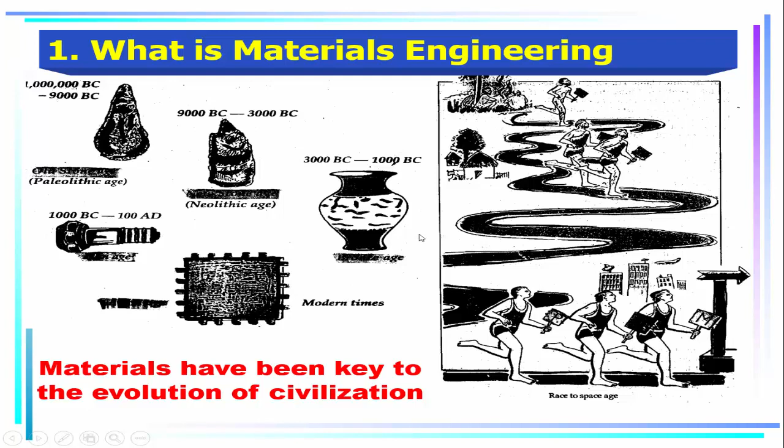The content of this lecture will be what is materials engineering. We will see the language of materials, role of materials in product success, inspection to prevent failures, materials repertoire, and global considerations.

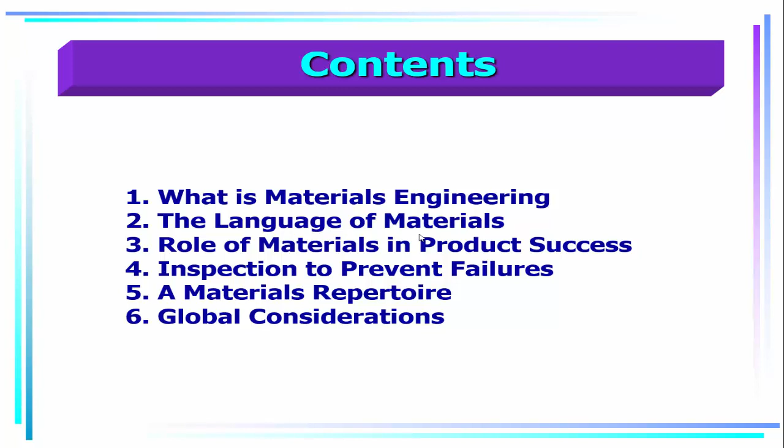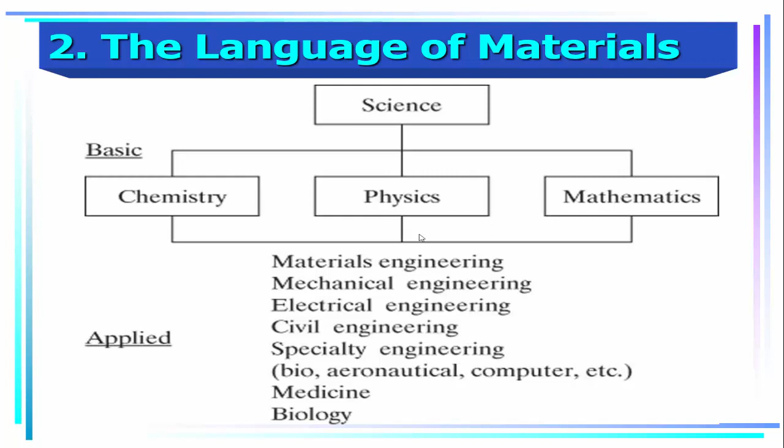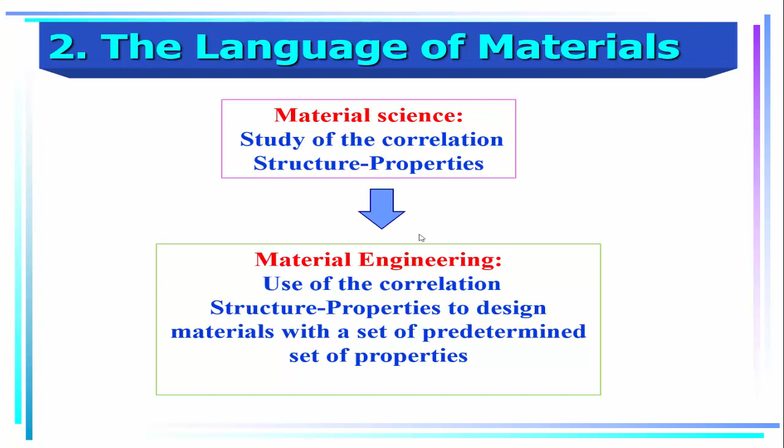The language of materials. We have the basic one, which is applied in science, chemistry, physics, and mathematics, and it is also applied in materials engineering, mechanical, electrical, civil, specialty, like bio, aeronautic, computer, and it's also applied in medicine and biology. So in material science, it's all about the study of the correlation of structure and properties, and in material engineering we have the use of the structure-properties correlation to design materials with a predetermined set of properties.

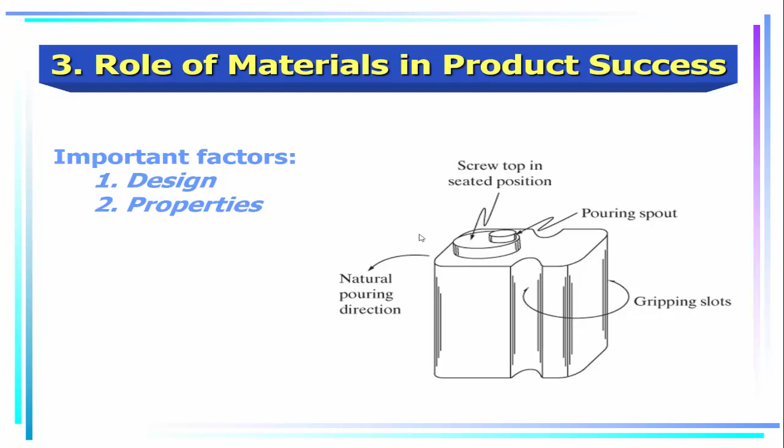So the role of materials in product success. There are two important factors, which are the design and properties. We have here a small example, like natural pouring direction, pouring spouts, screw top in seated position, as you can notice here, and we have the gripping slots.

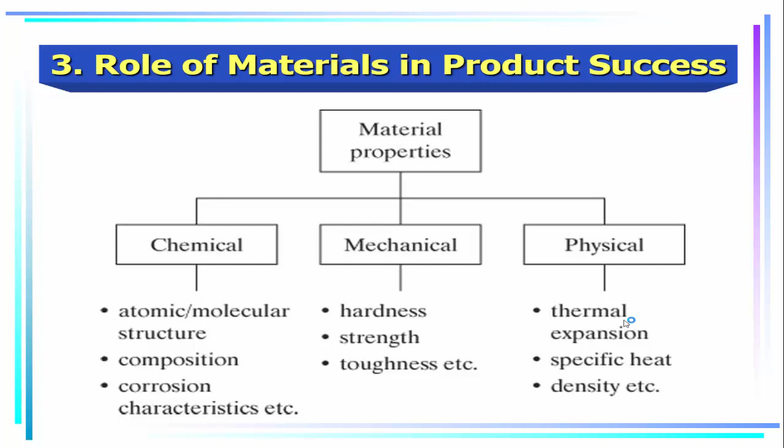So the role of materials in product success. Actually, the material properties are three. We have chemical, mechanical, and physical. Chemical, it's all about atomic, molecular structure, composition, corrosion characteristics, and so on. For the mechanical properties, it's all about hardness, strength, toughness, and so on. For the physical, we have thermal expansion, specific heat, and density.

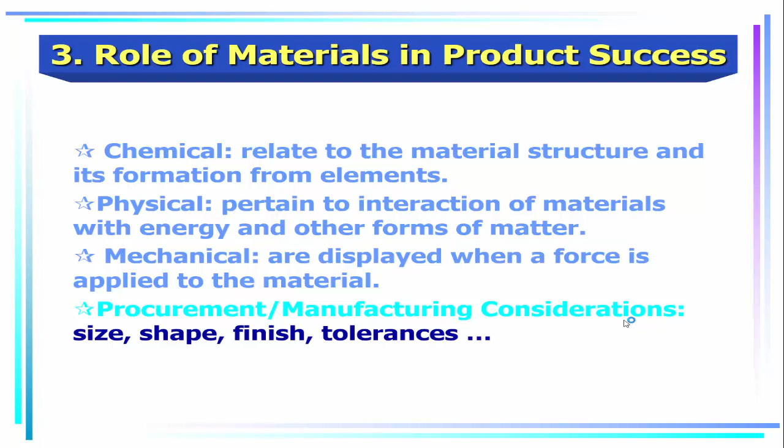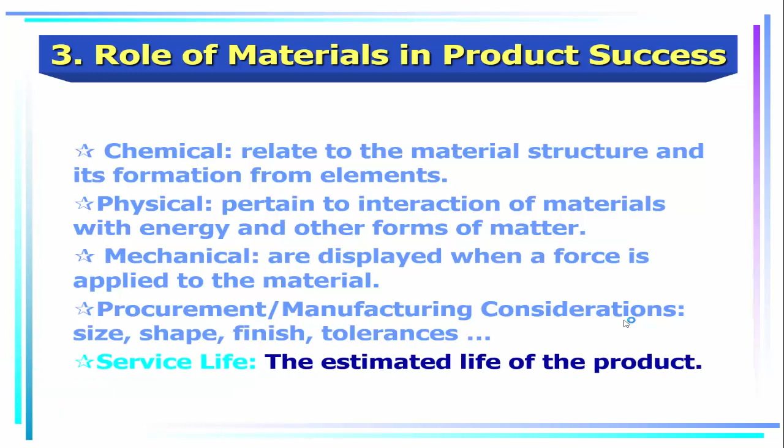Now I will explain what it is all about. So the chemical, it's all about the relation to the material structure and its formation from elements. Physical, it pertains to interaction of materials with energy and other forms of matter. Mechanical, they are displayed when a force is applied to the material. Procurement and manufacturing considerations, it's all about the size, shape, finish, tolerances, and the service life, which is the estimated life of the product.

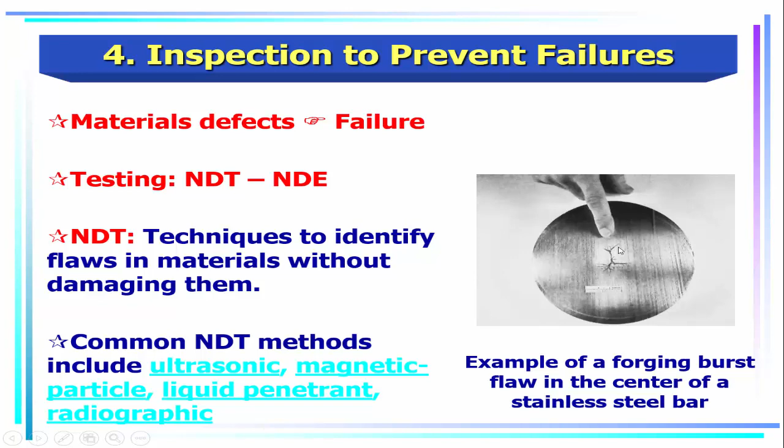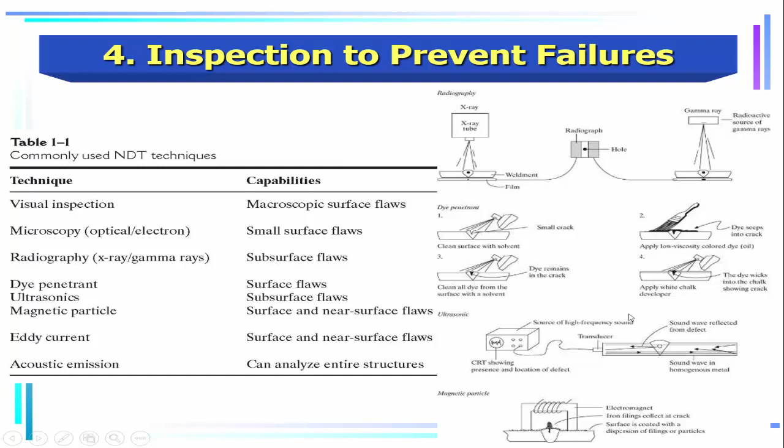Here is a table that contains some used NDT techniques like visual inspection, microscopy, radiography, dye penetrant, ultrasonics, magnetic particle, eddy currents, and acoustic emission. And each one has some abilities. For example, the visual inspection has the capability of detecting macroscopic surface flaws. Microscopy covers small surface flaws, radiography subsurface flaws, and acoustic emission can analyze entire structures. And here are some examples of some of the NDT techniques.

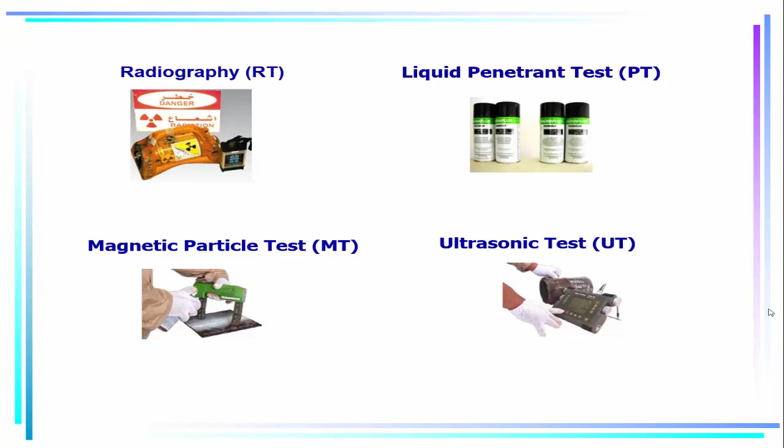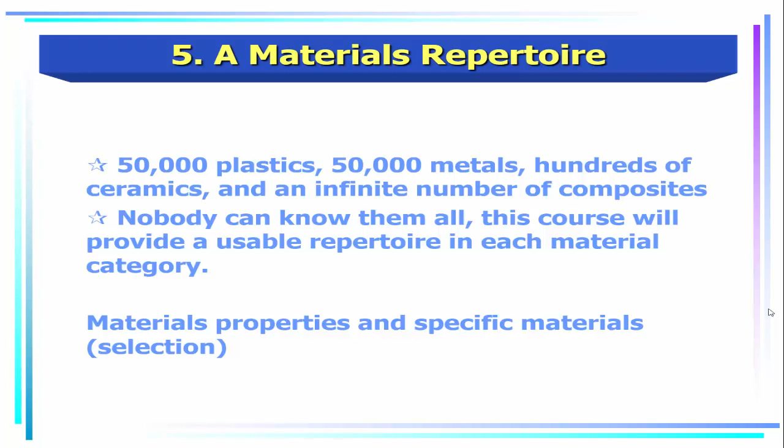Here I have the materials repertoire. For example, 50,000 plastics, 50,000 metals, hundreds of ceramics, and an infinite number of composites, and nobody can know them all. This course will provide a useful repertoire in each material category, materials properties and specific materials. Here are some global considerations, for example, the business aspects, environmental aspects, health and safety, the NDT business, nanomaterials, and the designations.

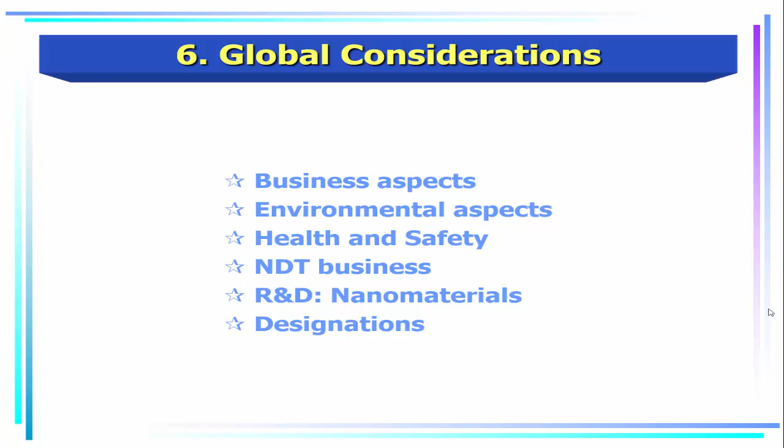So as a summary for this lecture, we have seen what materials engineering is. It's an applied science that interfaces with all technologies. We have failure that occurs because of design or material deficiencies, materials testing for deficiencies, and we have also seen the properties: chemical, physical, and mechanical.